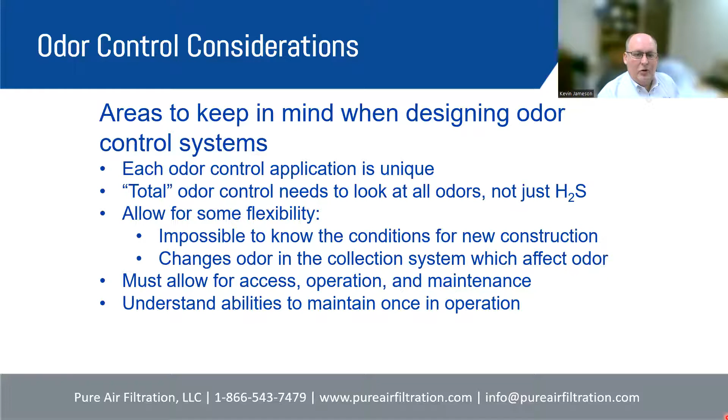So let's talk about types of odors. That's probably not a conversation you're used to having a whole lot. Let's talk about different wastewater odors, but it's important to talk about because, as I mentioned, not all odors are the same and they can be very different.

For instance, if you're dealing with a pump station, you may be dealing with a lot of fresh sewage odor. There may not be a lot of hydrogen sulfide, because hydrogen sulfide is generated basically through the anaerobic process of sewage sitting around. So if you're dealing with a pump station handling sewage that just came out of homes within the past few hours, there's not going to be any hydrogen sulfide created yet. It's going to be basically a fresh fecal smell.

We need to understand that because that's a different chemical, a different molecule causing that smell, and we need to understand what those smells are. In general, most of the odor issues we deal with, the primary odor by far is hydrogen sulfide, H2S, without a doubt. It's smelled at very low levels, it's an offensive smell, and it's very, very commonly found throughout the wastewater process. So this is going to be a primary focus, but not the only focus.

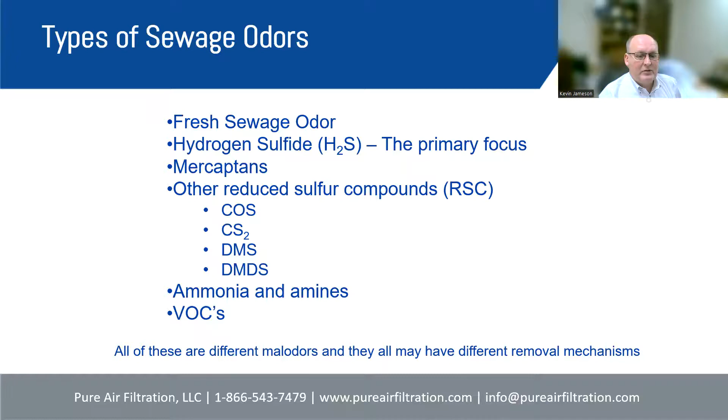So if you're not used to the term odor threshold, that means what is the typical level that the typical human nose can begin to smell these odors. And keep in mind that human noses are very different all over the place. My wife has a much better nose than I do. So some people can smell these at lower levels and some people can smell these at higher levels. Some people are extra sensitive to them, but generally these are considered the norms for typical odor control.

So again, these are all offensive odors. Sometimes they're called malodors, as we described, and generally they're all smelled at pretty low levels except for ammonia.

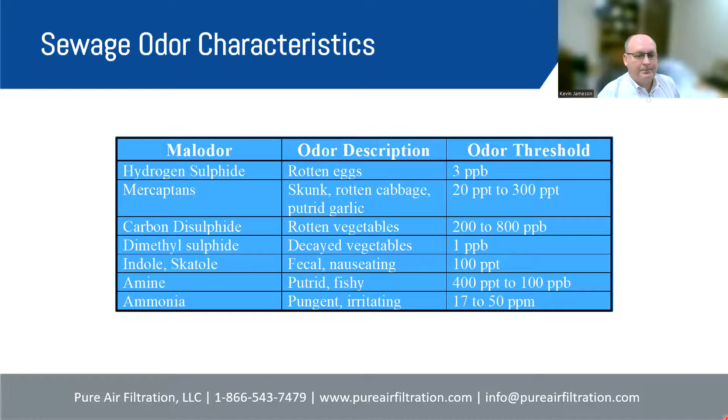One of the most useful tools for this is what's referred to as an Odalog or an Accrulog. Now, these are two different brands of instruments. Odalog is the original industry product, which was adopted by many people. I hate to say it, but they've gotten a little behind in the times as far as their electronics. And another company has come around by the name of Accrulog.

Accrulog has a fantastic product, similar to the Odalog. And this is a device which can even have cellular connection to it, but it's basically about the size of a soda can. And you can tie a rope to it and lower it down into a wet well, and it will collect data in regard to odors.

Now, there's a hydrogen sulfide version that's available. I believe there's an ammonia version available too, but it collects lots of data. For hydrogen sulfide, however often you want it to, but typically every 5 to 10 minutes, it might take a reading and collect that data. Once you've collected all the data you want, which typically we'd like to see about a week's worth so we can see what the odor looks like during weekdays, weekends, and at nights, you can download this data through a Bluetooth connection to the software they provide and really get some great information.

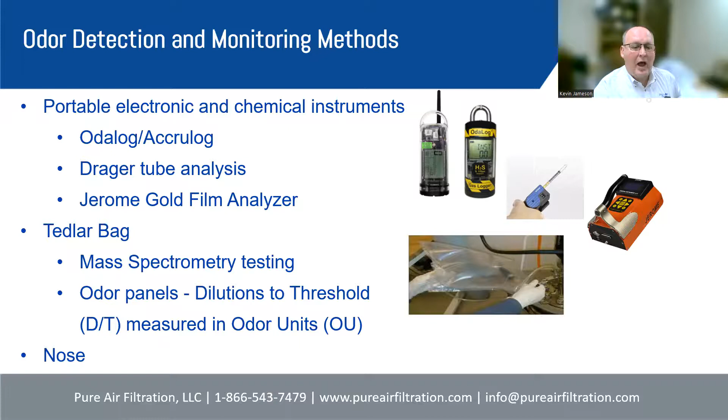But of course, you can always tell whether the odor is improved or not by just using your nose. So the key is that when we're taking a look at all these odors we're dealing with, there are many types of odors, and the level of the mix can be constantly changing. So we need to keep that in mind.

Offensive odor detections can be extremely low, at the parts per billion or parts per trillion level. Different odors need different treatment, so we're going to talk about that a little bit more here, but no odor can be the same. If you have an odor control manufacturer that tells you any odor can basically be treated the same, that their system, no matter how it's configured, handles all odors, I wouldn't believe that. These are all different molecules and they all have to be handled in different ways.

System designs really need to be effective to remove all odors. If you have people in a neighborhood complaining about a smell, and you put in an odor control system that just removed the hydrogen sulfide but it still has a smell, they don't care whether you reduced the hydrogen sulfide. All they care about is, was there an odor before and is there an odor later? So that's very important to understand—there are lots of odors and we need to try to work on getting all of them out.

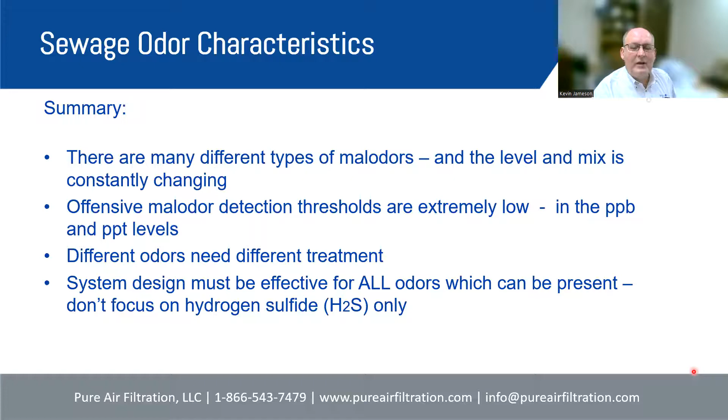So taking a look at odor control technologies, what do we have available? Well, we're going to briefly look at three odor control technologies today. Adsorbent systems, which is a primary product for our company, Pure Air Filtration. We're going to take a look at biological systems, because biological systems have a great fit in the industry. And we're also going to briefly talk about chemical scrubbers. Now, I'm no expert on chemical scrubbers, but we're going to talk about them because they're available and they do work. There's a lot of maintenance to them, but in certain instances, chemical scrubbers can be the right fit.

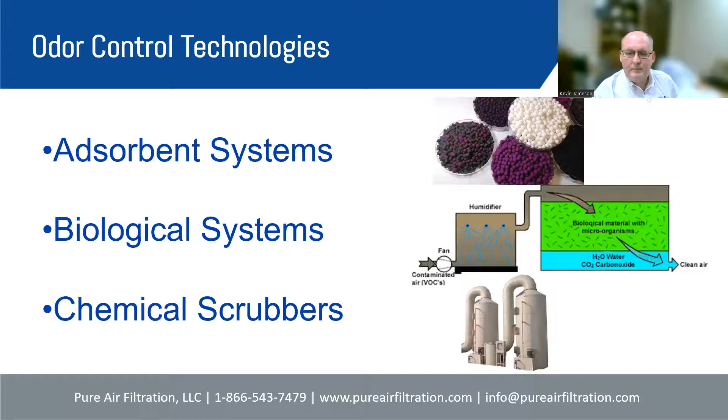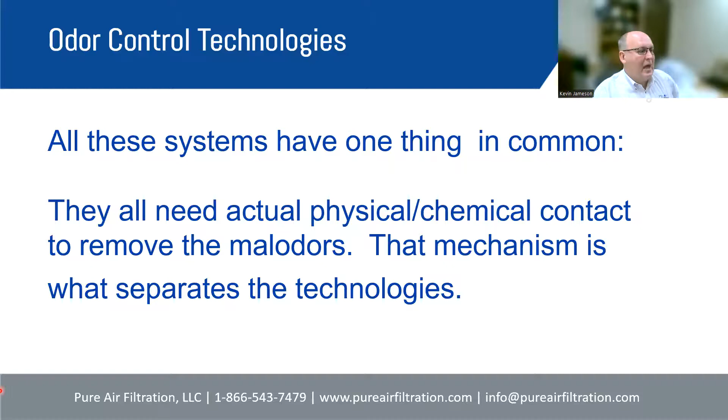But all of those systems have one thing in common: they all need actual physical chemical contact in order to remove the odors. And that's the mechanism that separates those technologies. So the key with all of these technologies is you have to be able to capture the odorous air, run it through a system, and have some type of contact in the system. Some systems need more contact, some need less, depending on the technology. And it's that mechanism which separates those technologies.

The efficiency of the system, that's very important. There's going to be no system that's 100% efficient. Now, there's plenty of systems that are 99.9% efficient, but typically you're not going to find anything that's 100% efficient.

Reliability is very important. Initial cost, of course, is very important. Operating costs, of course, very important. Footprint, space, height as well. Sometimes customers don't want a very tall system because it stands out and doesn't look very good.

Ancillary buildings, systems, and controls. What else is needed to support the system? We have some customers who are in very, very cold environments, and they end up needing to put some of these systems into buildings to prevent them, depending on the technology, from being in the kind of Arctic conditions. And that obviously drives the cost of the system way up when you're building a building for the system to be put in.

Of course, my favorite is maintenance and operation concerns. Sometimes those aren't considered very well, and there are some systems which require a significant amount of maintenance, and that should be known up front when you're looking at that. There are some maintenance operations which are better than others, and you should really understand the maintenance capabilities when you're looking at technologies, because to introduce a complicated technology to a maintenance operation which isn't very sophisticated can be very problematic.

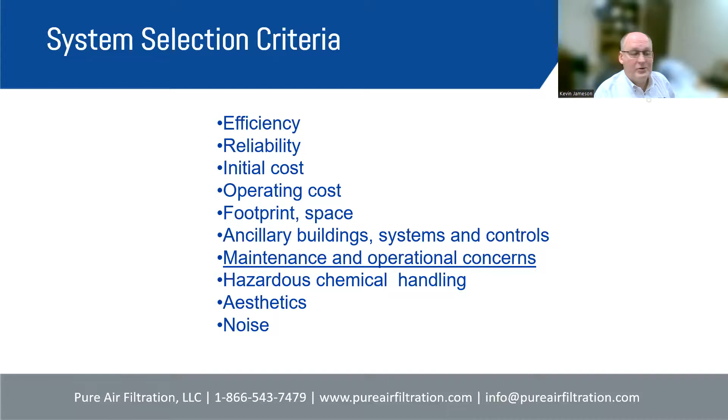So if you've got fairly low levels of odors, engineered adsorbents or activated carbons would be fine for low flows and low odor levels. Just plain activated carbon would be fine, and of course, engineered adsorbents would work very well. If you've got higher levels of H2S, typically activated carbon is not going to be very good because it doesn't have a high capacity for hydrogen sulfide, but some of the engineered adsorbents have very high capacity. We're going to talk about that in a little bit.

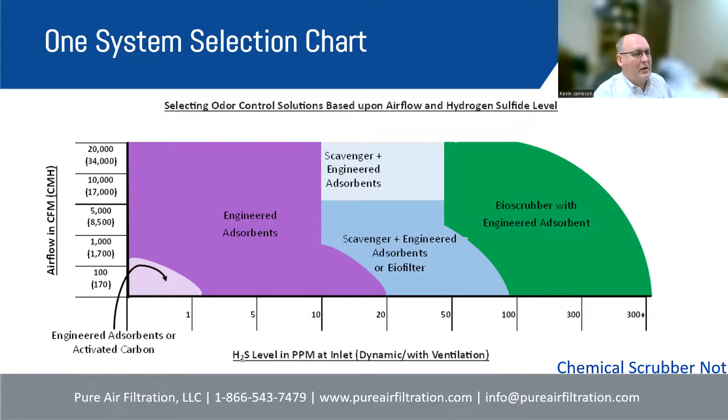So let's take a look at adsorbent systems. In general, there are three types of adsorbent systems.

Adsorbent systems can be activated carbon. Activated carbon is basically charcoal which has gone through an additional processing step, and it serves to capture odors and a lot of different odors. So it's good for general odor capture. It's really, really good for volatile organic capture. But in general, it has a low capacity for inorganic odors. Activated carbon, because of carbon molecules, has a really strong affinity for other gases with carbon molecules, but has a low affinity for typically non-carbon molecules.

There's various calculations you can make for different types of odors and how well they're going to work. But in general, activated carbon also allows for some of these odors to escape by desorption, and there's no way to measure the remaining life of activated carbon. So activated carbon is a good product, especially for removal of odors in commercial applications or for volatile organics, but generally it's not a great product for municipal odor control.

So what about the category of adsorbents called engineered adsorbents? Engineered adsorbents are similar to activated carbon. Some of them actually use activated carbon in the formulation, and they use a chemisorption principle. This chemisorption principle targets particular gases. We're going to take a look at some of these in a little bit, but basically it's modified to target particular gases and have a very high capacity for those gases as well. It's also a permanent reaction, so you don't have to deal with any desorption like might occur with activated carbon.

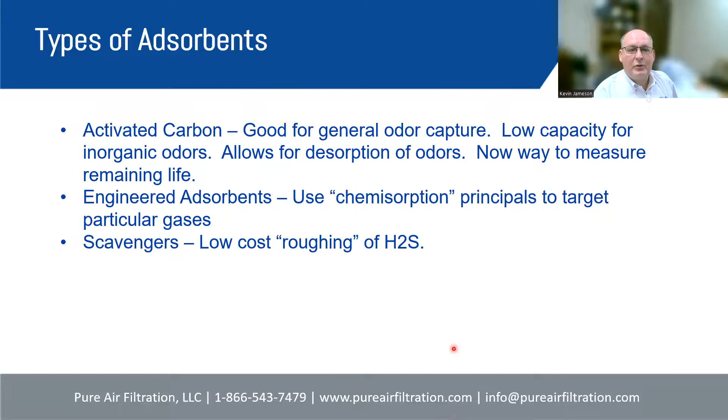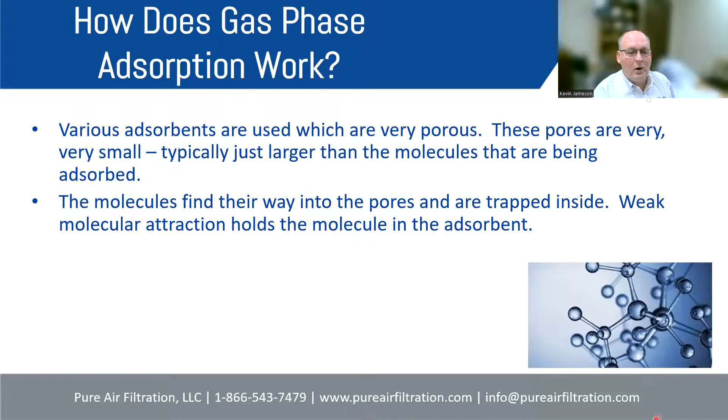So let's talk about those a little bit further. How does gas phase filtration adsorption work? Various adsorbents are used which are porous. These pores are very small, typically just larger than the molecules that are being adsorbed. Molecules find their way into the pores and they're trapped inside. Weak molecular attraction holds the molecule into the adsorbent. So it's kind of like cubby holes for molecules.

The principle used here is a process called adsorption, with a D, which means that gases go into—let's just call it activated carbon, because activated carbon uses the principle of adsorption. These gases go into the activated carbon and they're held in like a sponge. So just think of activated carbon as being a gas sponge. These gases go inside and into the activated carbon.

In the right conditions, though, just like a sponge—you can take a dry sponge and put it in a little puddle of water on a table, and that water is going to go into the sponge. Activated carbon works the exact same way. Those gases go into the pores of the activated carbon, travel into it, and find a little home in one of those pores, just like water travels up into a sponge and is captured in the pores of the sponge.

But just like a sponge, if you wring that sponge, the water comes out. Same thing with activated carbon. That wringing of the sponge would be like activated carbon being heated, or hit with high humidity, or a larger gas coming in and bumping out a smaller gas. It's not quite as rapid as wringing a sponge, but adsorption can definitely be reversed, and those gases can be desorbed from activated carbon.

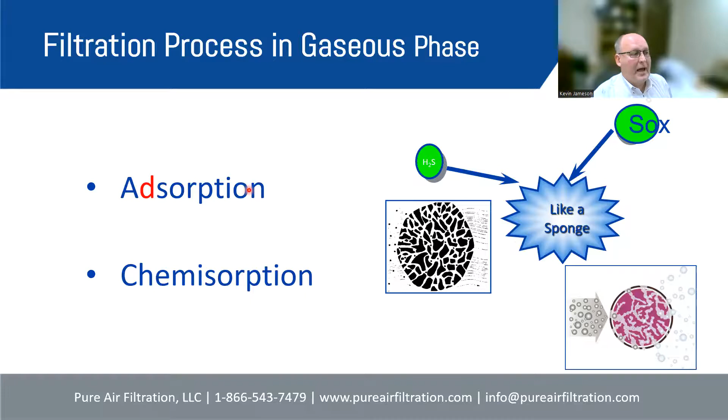Here is a microscopic view of those pores of activated carbon. This is an atomic microscope showing you these pores, and molecules are going into these pores. They're traveling further into the activated carbon, and they're actually sticking to the side of the carbon. This is all carbon molecules, and those molecules are sticking there, using the chemical principle of the van der Waals effect, where molecules stick to each other. There's no chemical reaction that occurs, they're just stuck to each other inside the activated carbon.

The thing that's so amazing about activated carbon is that 1 gram, just a small amount you could hold in the palm of your hand, has the surface area of a football or soccer field. If you measured the surface area of every one of these pores and laid it flat out on a soccer pitch, it would cover the entire field. That is how much surface area is inside activated carbon. It's absolutely unbelievable, and that's why it's able to capture so much in regard to gases.

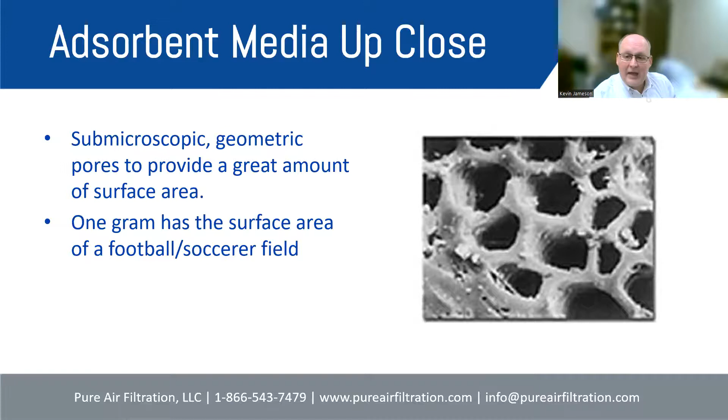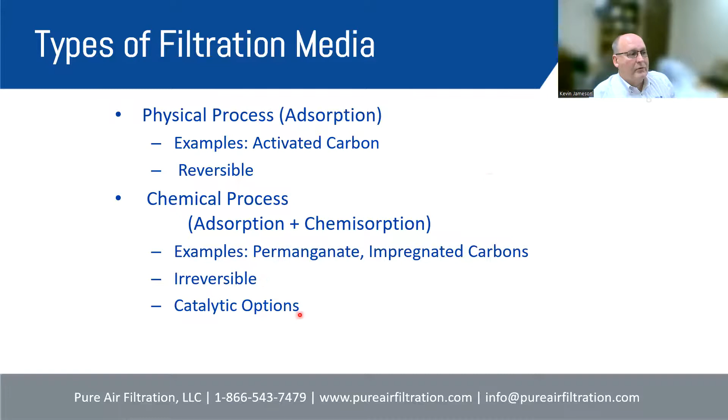So for adsorption, it's a physical process. We're holding those molecules in there and they can be released. Examples: activated carbon, it's reversible. The chemisorption process, some examples are permanganate impregnated aluminas, impregnated carbons, catalytic products. All of these are irreversible.

The various sizes of those pores are better or worse for capturing various sizes of molecules. Small pores are typically good for small molecules, large pores are typically good for large molecules. Also, large pores are very good for using impregnates on the activated carbon for capturing other gases as chemisorbents too. So generally, coconut shell carbon, which has very small pores, is not a good carbon for impregnating and turning into a chemisorbent, while coal-based products are much better for impregnation turning into chemisorbents.

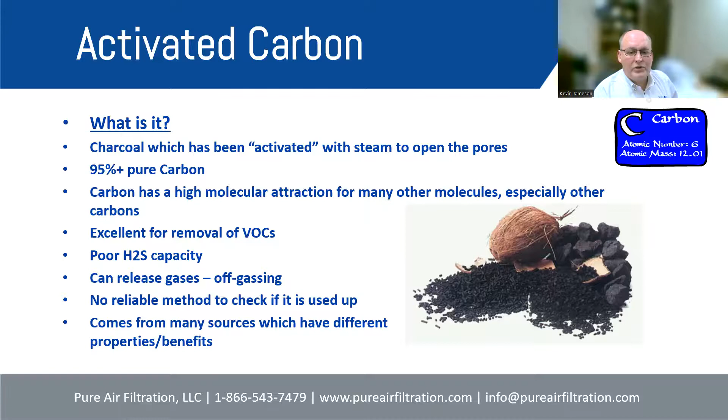It's great at VOC removal, poor H2S capacity, and can release off-gassing, as we brought up already. There's no reliable way of measuring how much the activated carbon has been used up, how much has been captured inside of it. So that's kind of a little difficulty with using activated carbon. And it comes from many different sources, as I mentioned. All the time we're hearing about other new sources of activated carbon, but the primary ones are various coal sources, coconut shell, and wood.

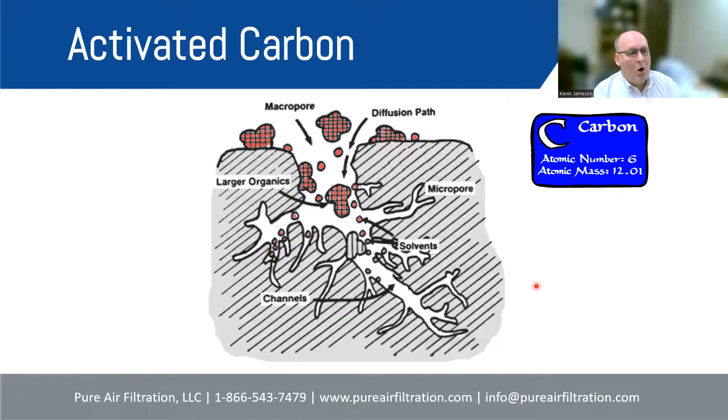Here is a micrograph that's used in a lot of presentations. I'm not sure who the original source is, but I've stolen it from others who have stolen it, I think. Generally, this graph shows you these pores, and the pores could start off larger and head down and get smaller and smaller. These small areas we'd consider micropores, so small molecules go down and get caught in the micropores. Larger molecules get caught in the larger pores, typically called macropores. So there's macro, meso, and micropores, and various carbons can be graded based on their percentage of micro, macro, and mesopores. So depending on what you're trying to use the carbon for, you would select the various carbons for that.

So we'll briefly discuss regeneration of carbon. I kind of mentioned this to you before. It is something that can be done. It is far less common to see regeneration any longer, but it is something that can be done. I just want to bring it up. PureAir typically isn't involved with it, but it's good that you know about it.

So there's two types of carbon regeneration. The most common is kiln desorption regeneration. That means you take activated carbon, and this can only be plain activated carbon, which doesn't have any impregnation on it, so none of the engineered adsorbents. You send it to a site which has a furnace, and they run this activated carbon through the furnace at a temperature which doesn't consume the activated carbon, but heats it up enough to drive off the adsorbed gases. Then they typically burn off those adsorbed gases, and then they can return it to use.

Typically, the product that comes out of a kiln is a less preferred product because it's been used already. It typically doesn't have the capacity of the original product because you typically can't get out everything that you put into it. But it is a way to recycle the product.

So if you have an application, especially if you're capturing a lot of hydrocarbons, a lot of volatile organic compounds, that is an option for you to send your activated carbon off for regeneration and then bring it back and keep reusing it that way. You can get a number of regenerations out of it before it can't be regenerated well again. Generally, you're going to lose some capacity each time you regenerate it. So you probably add some new carbon to it each time you do it, and you kind of keep it going from there. It's hard for me to say, but you might lose 5 to 10% capacity in each regeneration.

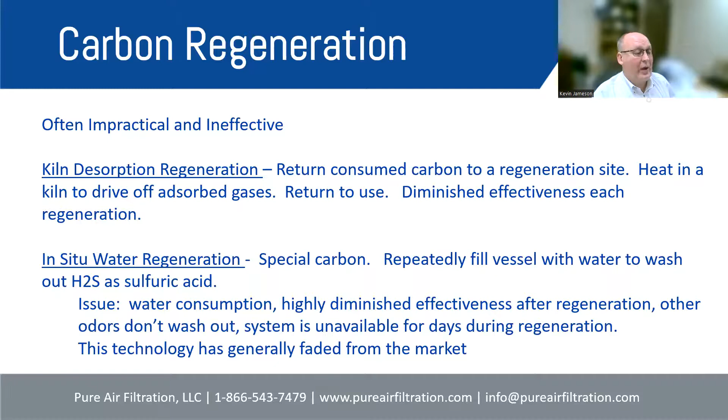Well, after a while, you're washing it really often, and it just isn't beneficial to it. So we don't see this product very much in the market any longer, certainly not in the North American market. There are a couple pockets of the world where it still exists. It was an interesting product, but unfortunately, unless you have an H2S only application, it's not really very good.

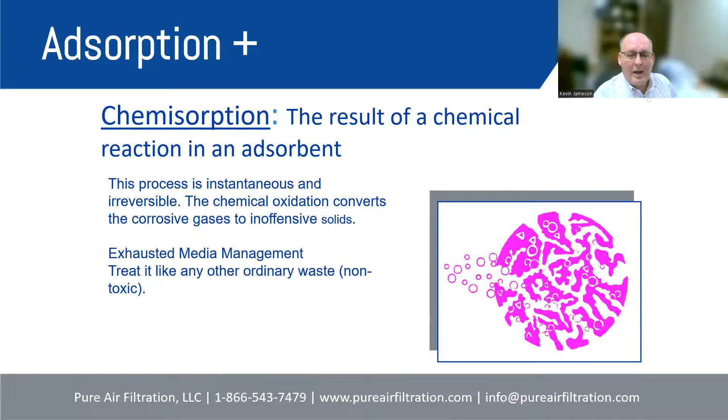All right, so let's talk about chemisorption. We've moved on from activated carbon. Chemisorption is where we have taken an adsorbent and put a chemical on there, and it's going through a chemical reaction to focus on particular gases, or could be broad range gases.

So there are two parts of an engineered adsorbent. There is the substrate, and that's what creates the pores. And then there are the impregnates. That's the chemical that we put on there in order to go through the reaction.

So the various substrates we have to work with: activated carbon. As I mentioned, activated carbon is the king of porosity. Generally, the kinds of numbers we talk about are about 1,100 square meters per gram. That's a fantastic number, really, really high.

Another is alumina, which is activated alumina, aluminum oxide. Still a great product, it's generally inert, so we can put lots of different chemicals onto this alumina for reaction. It still has really good capacity as far as surface area and porosity, but it's only about a third of that of activated carbon. So that just tells you how great activated carbon is for porosity. Alumina, which is still a great product, has about a third the capacity.

Zeolites, there are a broad range, but the primary one looked at here is a naturally occurring zeolite. It has some porosity, generally about a third the porosity of alumina, so about a tenth or ninth that of activated carbon. The advantage is it's really, really cheap, so for some non-critical, cost-sensitive applications it can be used. There are some other clays similar to zeolites which can be used for some products as well that provide some porosity. Generally, the clays are not going to be very porous. They'll have some porosity, but they won't be very porous.

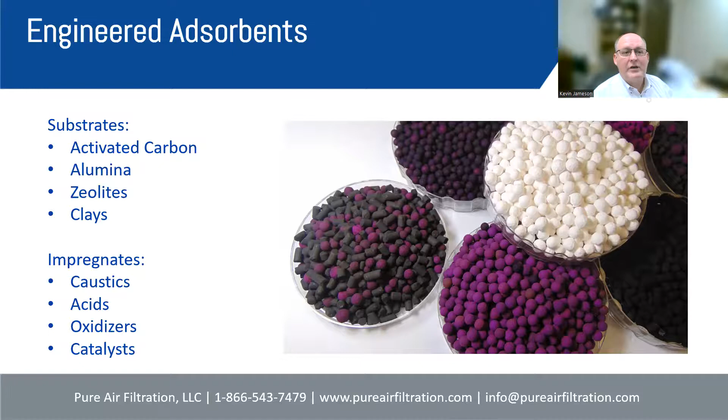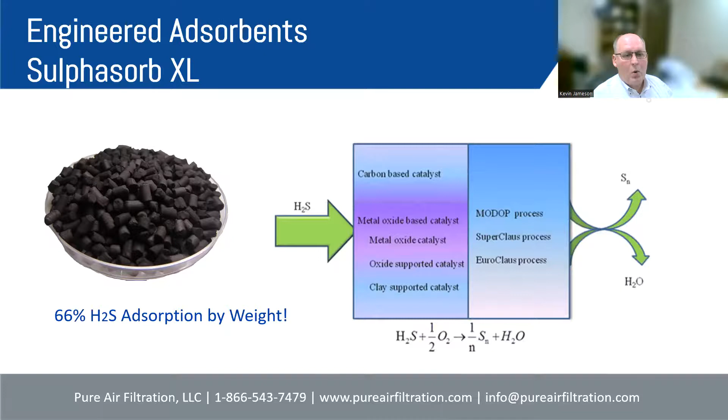And these are just some more specifics about it. This is the Sulphasorb XL catalytic type product, 66% by weight, really phenomenal for H2S applications. The capacity is actually more than 66% by weight, but the removal performance degrades significantly beyond that. Even though it might not be as efficient after 66% weight, it still captures some H2S, and it's really fantastic, especially for the wastewater industry for taking out hydrogen sulfide.

The permanganate impregnated aluminas, sometimes referred to as PIA, we have both 8% and 12% concentrations of permanganate onto the alumina. So it's activated alumina impregnated with permanganate, typically potassium permanganate. There's also one called sodium permanganate, which we can use depending on the application. Again, it works on oxidation.

The really nice thing about this product is it's completely non-combustible. There have been concerns in the past about activated carbon and carbon bed fires. We won't go into that too much since it's kind of an old problem, but if you use an impregnated carbon, especially caustic impregnated carbon, which was more common in the prior century, there is a substantial chance of fire. I won't say a major chance, but there are well-documented cases where caustic impregnated carbon has caused carbon bed fires and a couple really big disasters. So customers are very focused on not allowing that to happen again, and using products that are completely non-combustible is very favorable with those customers. You definitely want to avoid caustic impregnated carbon. It works well for odor control, but the potential for carbon bed fire is very dramatic.

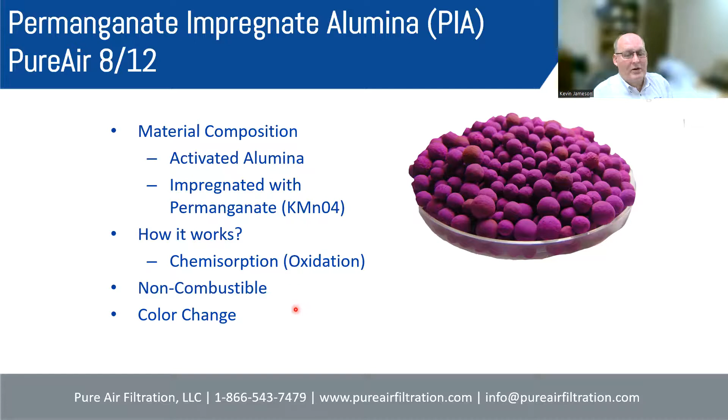And then I mentioned the color change for this product. Now here's an interesting one: a blend of carbon and permanganate impregnated alumina. We use this as a polishing media to capture all those other odors after our catalytic Sulphasorb XL takes out the hydrogen sulfide. If you blend activated carbon—which is charcoal that's just gone through an additional step—with our permanganate impregnated alumina, the blended end product still meets Underwriters Laboratory fire rating, called UL 900. So even though you're using activated carbon, you still get a fire rating for that product. That's a very nice product.

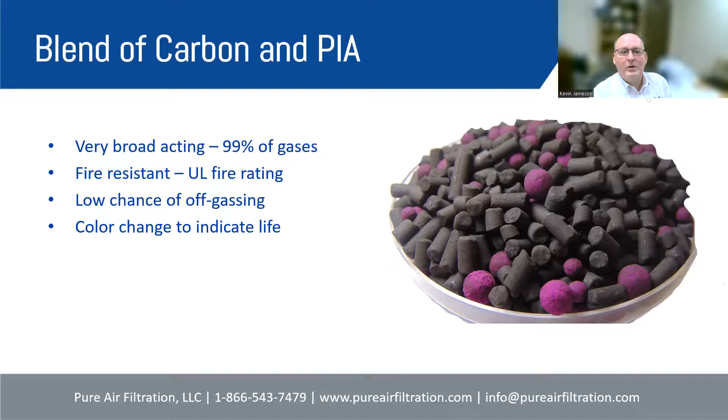There's a low chance of off-gassing, because if you do get any off-gassing from the carbon, typically the permanganate impregnated alumina is capturing it, and you still get that color change—these purple balls will turn to a brownish white. So you could take a little sample of it and know whether it's being consumed. This blended product is very powerful for capturing those other odors inside an adsorbent system.

So the last area of adsorbents I want to talk about is scavengers. Scavengers are products which are kind of a low engineering product and have a low cost. This scavenger is actually our product, Sulfadsorb Fe, for iron. Sulfadsorb Fe uses iron oxide to react with hydrogen sulfide, and it has generally a pretty high capacity, but it's not as quickly reactive to hydrogen sulfide as some of our other products. So generally it requires more contact time or a lower stated efficiency.

But what's really great about this product is that if a customer had an application with elevated levels of hydrogen sulfide and didn't want to put in other technologies, this will trim down that level of hydrogen sulfide to a more manageable level. Then at that manageable level, you could use engineered adsorbents to take out the remaining amount. So scavengers would very often be used in a two-stage system where the scavenger takes out, let's call it 90% of the hydrogen sulfide at a lower cost, and then engineered adsorbents take out the remainder, as well as any other odors.

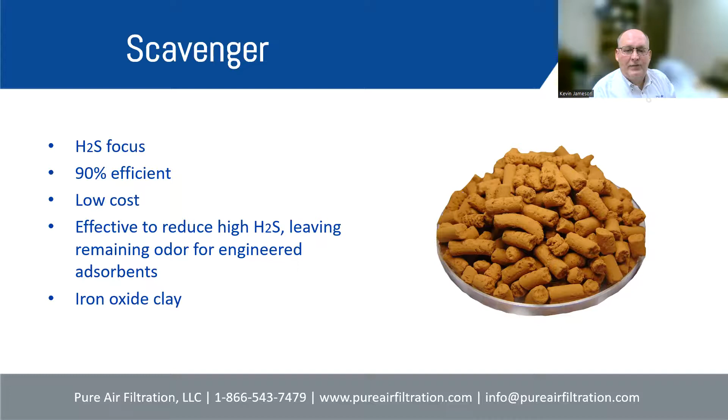So let's take a look at systems now. Here's a typical system, and I chose this one because it happened to have 3 different colors representing 3 systems, so it allows you to understand what the different pieces are.

So a typical adsorption system that has adsorbent media in there has basically 4 components. There's an inlet mist and grease filter.

Does that have to be there? No, it doesn't have to be there, but we strongly, strongly recommend it, especially for wastewater applications, because these systems operate typically 24 hours, 7 days a week, 365 days a year.

And a wastewater environment typically has very wet air coming into it. Now, wet, I'm not referring to humidity, but droplets of water. And if you're running these systems 24/7, eventually you're going to be pulling in a lot of water droplets into the system.

So it's very, very important to have a high efficiency mist and grease filter here to capture those contaminants and then drain them out or capture them inside the filter pad, so they don't collect inside the fan or inside the adsorbent system.

This adsorbent system is filled with adsorbent. That adsorbent does not like to get wet, and so we want to try to keep those water droplets away from it.

The water droplets we're talking about are fog-sized water droplets that eventually, when you operate 24/7, accumulate to a great deal of water. So having a highly efficient mist and grease filter at the entrance of the system is very important.

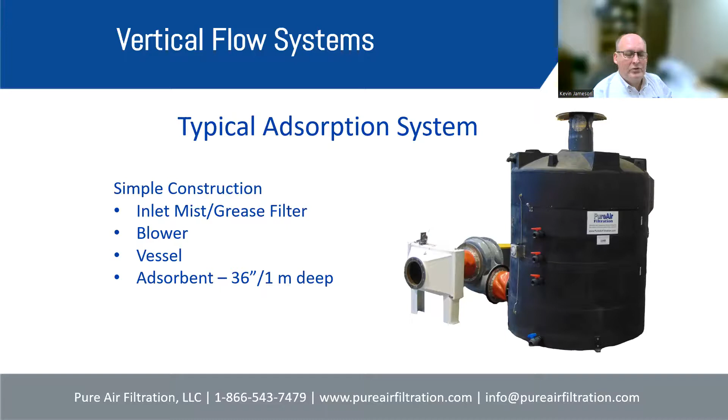So there are small systems. I mentioned these systems that have the fans on the outlet. So these systems have a mist and grease box, the vessel, all of this is made out of HDPE.

And then it has a cast aluminum fan, which is corrosion resistant, but I wouldn't want to put that on the inlet side of the system. It's cast aluminum is corrosion resistant, but it's not corrosion proof.

And so these are very, very nice, what we call economy systems, not highly customizable, but very, very effective. Your performance, on a ratio of amount of adsorbent media for overall price of the system, this is your most economical system. We have horizontal flow systems.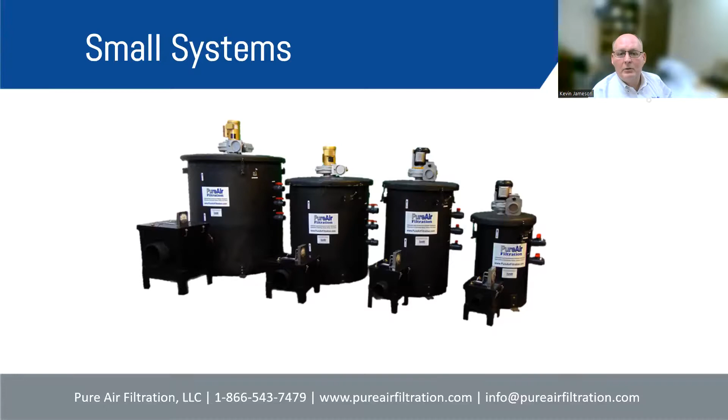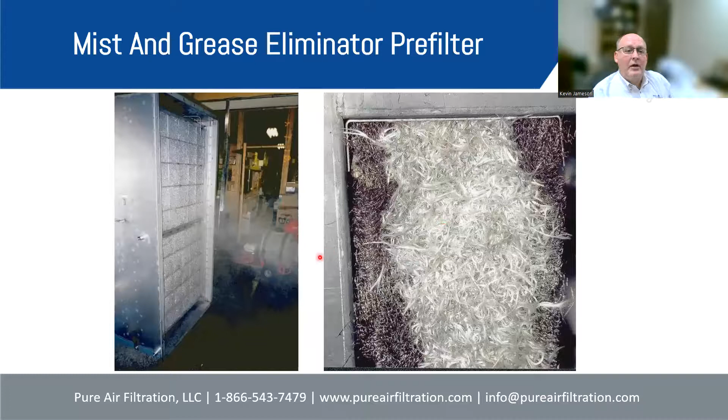Let's take a look at that mist and grease filter. Here's an example of us testing a mist and grease filter going into a stainless steel system. You can see the fog that's going into the system. That's the kind of water that this type of filter removes very efficiently, typically 99.9% efficient at water droplets, even down to 2 microns.

So this is what this mist and grease filter pad looks like. You've got a stainless steel mesh along with some glass fiber mesh, and then some further stainless steel mesh, basically just to make sure the filter is reversible. And the mist, the water vapor, is going to be captured in here, and it will eventually drain down to the bottom. There's a drain at the system, and that water will be captured and drain out of the system.

The grease will be captured in here, and these filter pads, which are permanent filters, but do periodically have to be pulled out and maintained, can just be washed in a hot detergent bath and a pressure washer, and then they're able to be reused. So it's very common for customers to order a spare set of these filters, so they always have one set that can be put into the system clean while they're taking the other set off to be cleaned. Customers always want to know, how often do these have to be cleaned? Typically every couple months, maybe, depends on how much. It's really the grease and dirt that has to be washed out, so it depends on how much grease and dirt you have coming into the air of the system. That'll tell you how often you have to clean it.

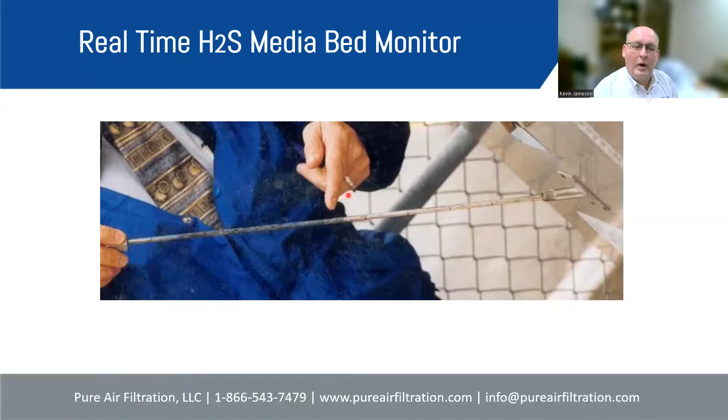This product is evolving. Currently it is a rod which goes down through the adsorbent media and has an array of sensors on it, which feed back to a PLC and basically monitors where the corrosion, where the reaction has occurred, and it's actually able to feed back to the customer a date for when the adsorbent media needs to be changed out.

PureAir continues to evolve this product. Our next generation, I'm very excited, is about to be released at a much lower cost. It looks like we'll be able to put this on basically every odor control system going out at very low cost. Our customers absolutely love this product because it allows them to really monitor the adsorbent system and know whether it's functioning or not.

One of the things I like to say about PureAir systems is we take invisible odorous air and purify it, and out comes invisible non-odorous air, but you can't look at it and see whether it's working or not. So it's not easy for somebody to understand the exact status of the system without putting their nose into the outlet.

So this electronic system really gives the customer a predictive ability so they don't have to wait until they start smelling odor coming out of the system and then react quickly to change out the adsorbent media. It allows the customer to know how much of the adsorbent has been used and when it needs to be changed on a proactive basis.

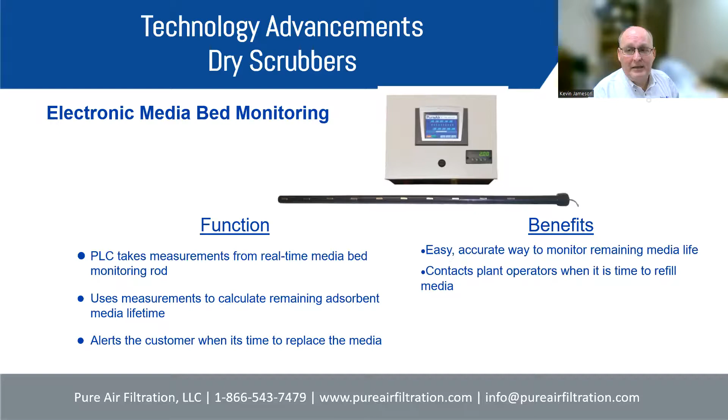So we've covered adsorbent systems, which is our company history, but we also want to address other technologies out there, such as biological odor control. We break this into two categories, and unfortunately there's no standardization in the industry about naming these products, so I'll let you know how we name them. We can argue back and forth about what they should be called, but generally we're referring to biofilters and bioscrubbers, or biotrickling filters.

Lava rock has been used as well. These are all very porous substrates that bacteria can grow on. Generally, you take your odorous air and blow it into the bottom of these systems. You make sure that air is very humid, because the bacteria that grows on these systems to eat the odor requires high humidity. You blow the air into the system, and as it percolates up through these beds of mulch or whatever you're using, the bacteria will eat those odors.

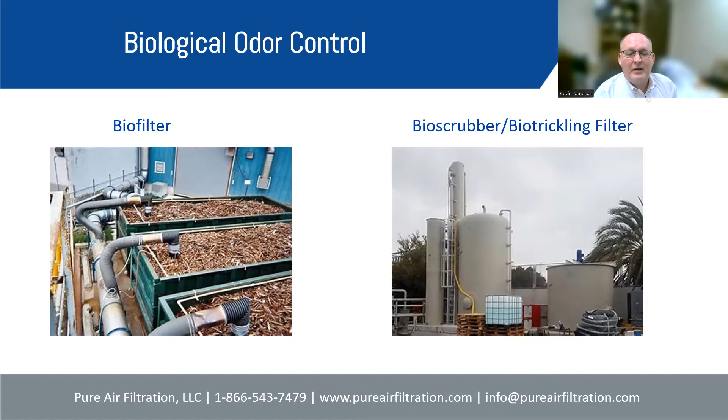If there's ever a disruption in this system, those bacteria will be killed and the system has to be restarted. During that restart, which can often take a couple of weeks, the adsorber system nearby is able to continue to provide the odor control needed, even at higher levels, providing backup in case the biological system has an interruption. It's a really great technology. It can provide basically 100% odor removal with the two systems together, or the adsorber can back it up in case there's a problem with the biological system.

The bioscrubber, again, is a more engineered system. We've got a contained vessel, and spray heads that are continuous in a loop, spraying water and nutrient onto the packed column. The key with this technology is all about surface area, and having a substrate that will hold up to a very, very corrosive environment. These systems typically operate in the range of 2 to 4 pH, an extremely acidic environment.

The bacteria we use is a very special bacteria that we inject into the system initially, which loves to grow in these highly acidic environments. This is the type of bacteria found naturally in geysers and hot spring pools that love highly acidic environments. We also inject some acid in the beginning to make sure this is a highly acidic environment. This highly acidic water then circulates around the system, and the bacteria grow.

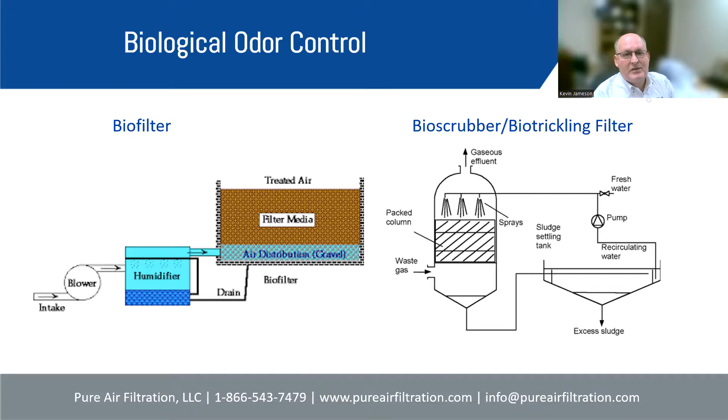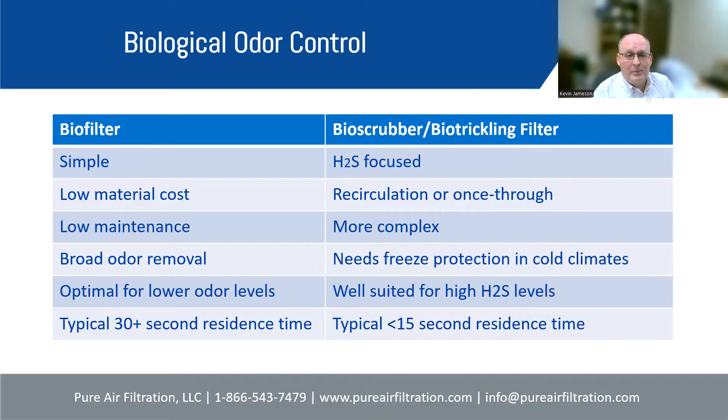You need to be concerned about cold climates. They're typically not well suited for cold climates because you've got this liquid circulating that you've got to maintain at a particular temperature. The microbes like to be within a particular temperature range, and you don't want pipes freezing on you.

All right, we're going to very briefly at the end talk about chemical scrubbing. This is an example of chemical scrubbing, basically taking a tower with packing like our biological system and using a reactant chemical. As the air enters the tower, typically from the bottom, it goes up and comes out the top. There's a spray system reacting in there with the packing, allowing for a chemical reaction between the gas entering the system and the neutralizing agent.

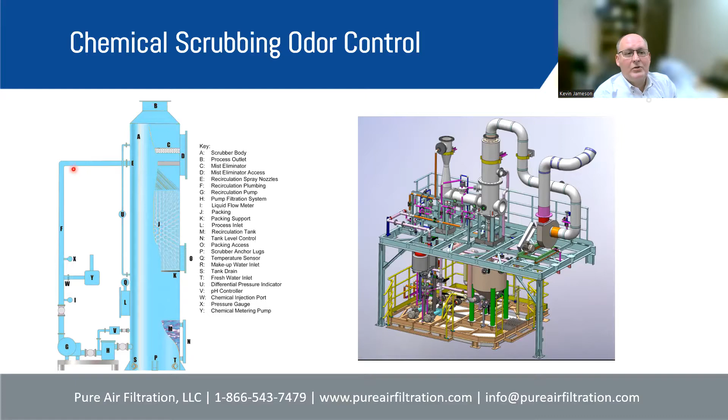These are for odor control. Typically a caustic solution is used, or you might use bleach for removing these odors. They are very good for applications with high levels of odor and maybe high airflow, because this can be cost efficient for a high odor level and high airflow.

The problem with these systems is they're far more complicated. There's a lot of instrumentation, and that instrumentation is in a very harsh environment. Trying to keep these things up and going is difficult, and any of the chemicals used as reactants are hazardous, without a doubt. So your personnel are working with these hazardous chemicals, and those chemicals are typically very hard on all the instrumentation, valves, and pumps. So I have some experience with wet scrubbers.

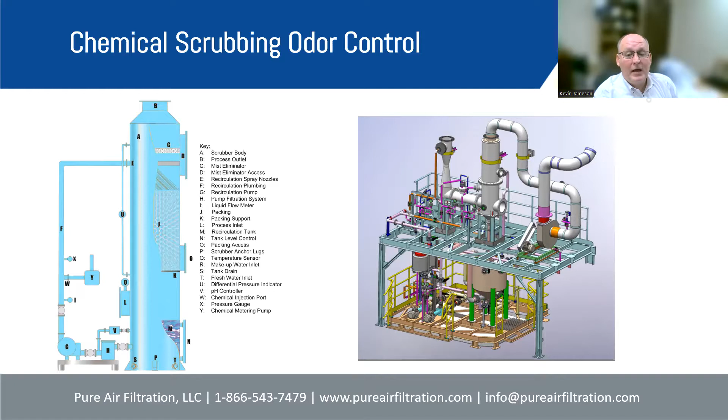PureAir generally does not work with wet scrubbers because we don't see ourselves as experts in that field, and because of the maintenance involved with the systems down the road. But it can be a very good technology when chosen for the right type of application and the right organization.

That has the ability to maintain these properly, and to control the hazardous chemicals used inside of them. They're typically focused on one gas, with high concentrations of reactive hazardous liquids. Maintenance requirements are significant, and they typically have to be designed for your maximum gas level. So you have to know your maximum concentration and design the system based on that. But generally, it has the lowest overall footprint per unit of airflow, and the cost for these liquid systems is typically fairly effective as well.

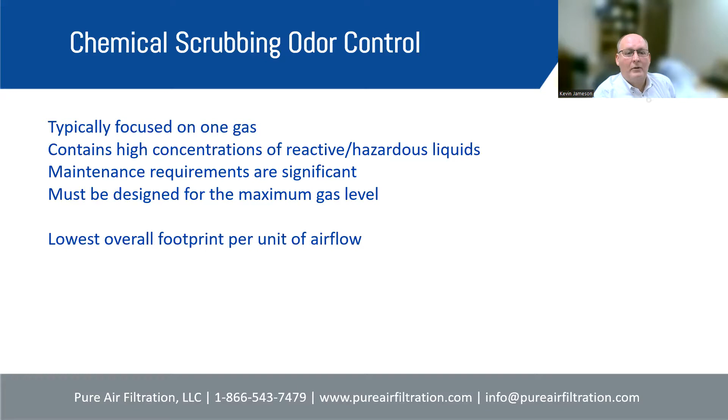Taking a look at all the advantages and disadvantages, activated carbon typically has low maintenance and high efficiency. The disadvantage is the replacement can be very significant, especially in high H2S environments where you're going to be changing it out very often, with that degassing going on.

Engineered adsorbents typically have low maintenance requirements, high efficiency around 99.9%, and many configurations. You can also remove lots of different odors if you're layering your adsorbent media. The disadvantage is you do have to replace the adsorbent periodically. We typically say every 18 to 24 months for a system, but it depends on the amount of odor coming into the system.

Biofilters, the nice thing is there's no hazardous chemicals there, very low maintenance, but they do have a large footprint. Bioscrubbers generally have no hazardous chemicals.

I did mention that the liquid being recirculated has a low pH, but in general you're not adding anything to it, so you're not having any contact with it. It is very effective at high H2S levels, and it's generally considered a green technology because we're using bacteria to remove odor.

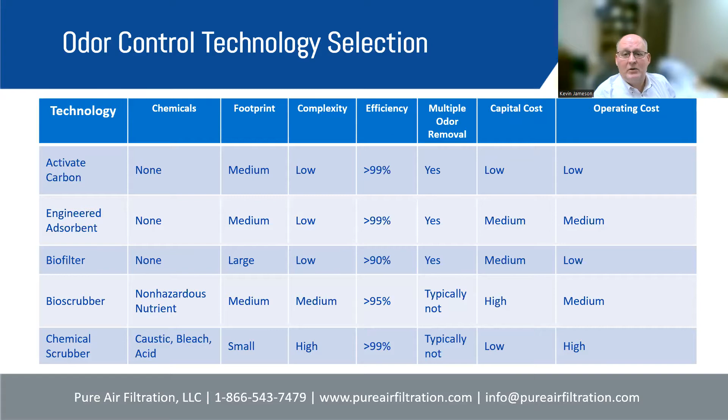So generally the conclusions are total odor control is possible, and if you're doing a good job, working at it, it's very possible and you should plan for that. Selection of technology requires either knowledge of what your odor is, or you're going to have to assume, and assuming can be dangerous. We really think the hybrid technologies are excellent technologies to consider.

If you've got a high H2S application, a bioscrubber followed by engineered adsorbent systems is fantastic. Or a scavenger followed by engineered adsorbent is really fantastic as well. Maybe if you're in the 20 to 50 ppm range, a scavenger followed by engineered adsorbent is great. A bioscrubber anywhere from 20 and above, followed by engineered adsorbent, is great. So just keep that in mind for some of those applications. PureAir is here to help you out with your selection, of course.